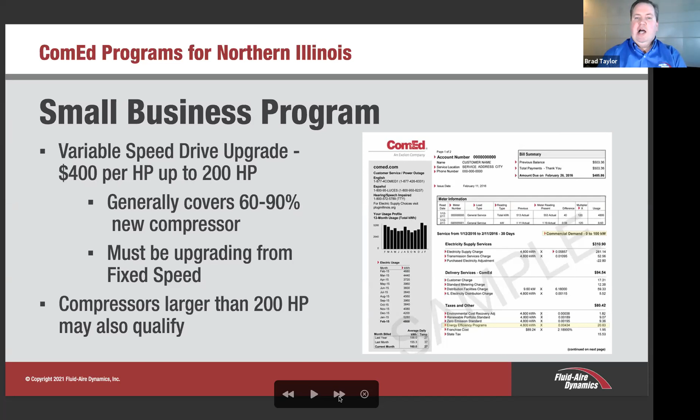There are a couple stipulations. I mentioned one earlier about the 12 months trending below 200 kW. The other is you must have a fixed speed rotary screw compressor already installed. They don't want to be incentivizing something that's not going to give them the returns they're looking for in energy. And compressor systems, I don't think they exactly limit it to the horsepower, but the larger horsepowers typically push accounts above the 200 kW mark. So it's very rare that we would see compressor systems much larger than 100 horsepower qualifying for the small business program.

Other rebates, we talked about the standard or prescriptive briefly, similar to the variable speed offering on the small business side where they're promoting $400 per horsepower. The prescriptive rebate for VFDs on the standard is $85 per horsepower. They're also covering zero loss drains and high efficiency air nozzles. Now, high efficiency air nozzles can include blowguns, which are the simplest form. But any of you that are using jets or nozzles for parts ejection out of a die and stamping, it's very common to see open blowing copper tubes. This would be a great addition to an energy savings campaign to add some energy efficiency type nozzles.

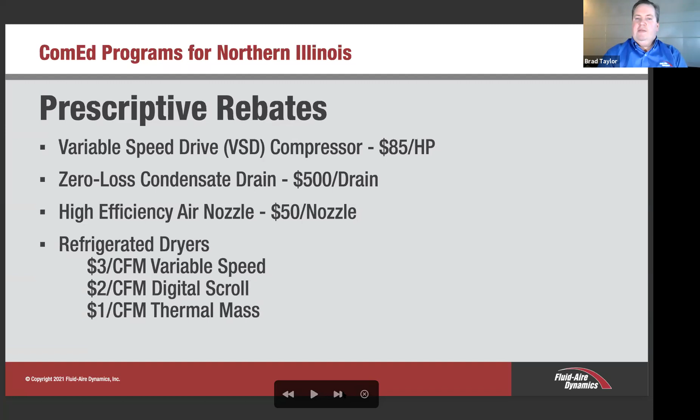And then refrigerated air dryers. There are different types out there in the refrigerated sector. Of course, there is the non-cycling type dryer that just constantly runs regardless of the load. And then there are 3 types of energy savings type dryers that are incentivized by ComEd. Firstly, the thermal mass cycling type dryer, which they incentivize at $1 per CFM. And then the digital scroll at $2 per CFM. And my favorite, which is the variable speed drive refrigerant dryer at $3 per CFM. And just a quick note on the variable speed type, typically we don't see them until after about 500 CFM, and they hold a very constant dew point. So one of my favorites.

Hey, Brad, before you go on, I wanted to share the results from that poll: 40% are using fixed speed, 20% are using variable speed, and 40% are using both. And also have a question from Matt. He's asking, is the 12 months below the 200 kW an average, or does it need to be under 200 each month? So it has to be under 200 each month. If you send me your account number, I can plug it into the tool that ComEd's provided us, and I can generate an Excel report to make it very easy for you. But yes, it does have to be under 200 kW for 12 continuous months.

Thank you. Just a note on that, I've had some customers that have multiple suites of their building with multiple meters all wrapped under one bill. ComEd does allow you to separate those bills into separate accounts. It'll take some time, but it is a strategy to getting a particular suite qualifying for small business going through that route. May take a year to qualify, but in some instances, very much worth it if you can wait.

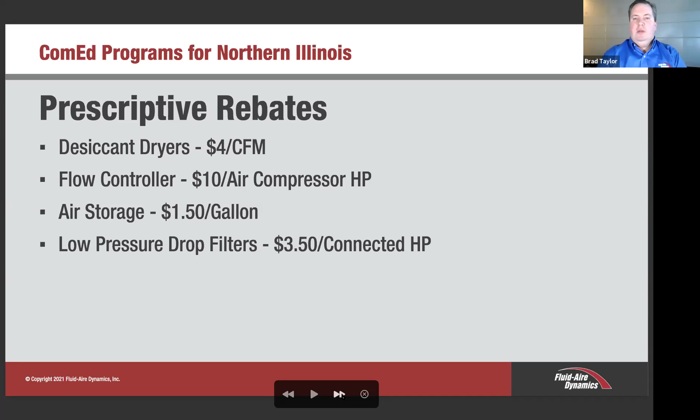Another program that's been very successful, ComEd launched, I believe, 2 years ago, is their Fix It Now program. And as the name states, it simply allows us to do a very quick implementation of certain types of projects in your facility. Most commonly done in the compressed air sector is leak detection and repair.

So they're paying qualified service providers $6 per horsepower, operational horsepower in your compressor room, to basically do the paperwork and review the system. And then $20 to identify any leak in your facility, and then an additional $100 to repair any of those leaks within your facility.

So what we have found is that at that rate, we're able to cover upwards of 90% of the leaks within your facility, largely because leakage is found in the simple down and dirty Milton coupler or Insta tube fittings, slit hoses, bubbly hoses, simple O-rings, things of this nature.

Of course, there's some of the more expensive leaks, such as a large cylinder or a metric cylinder that has to be sourced from overseas, or a leaky counterbalancer on a punch press. Of course, these are very costly repairs that would be in excess of the $120 ComEd's providing us.

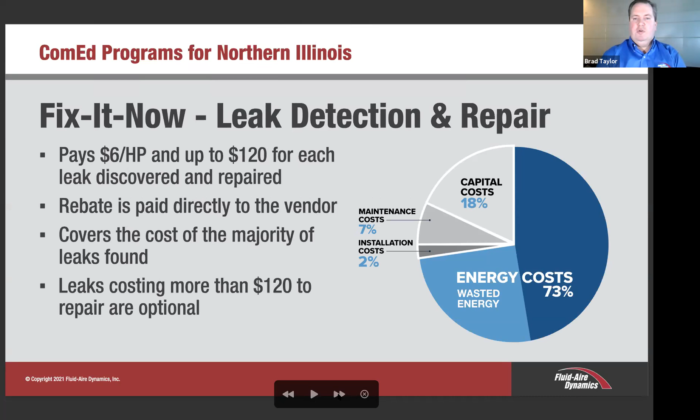So like the small business program, there are also other offerings, including the high efficiency air nozzles, which again is commonly just the blowgun. Low pressure drop filters is also $3.50. And then the no loss drains are $500 per drain.

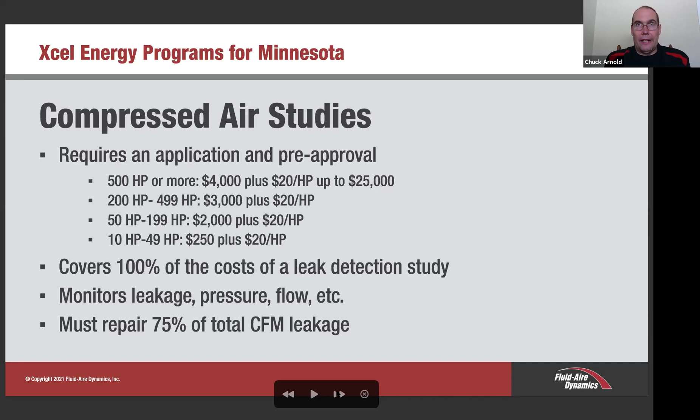So the responsibility of the customer for air studies, to make sure the vendor gets paid, and we all enjoy getting paid in the end, is to repair 75% of the total leakage. So you get the benefit of leaks getting tagged. After you fix them, you get the energy savings, and then we submit the paperwork to Xcel, and boom, Xcel pays us directly. The nice part about that program is there's no cash flow interruption for the customer. So the commercial aspects of it are handled between us and Xcel.

They're essentially a large low pressure drop filter, and those kinds of filters are the reason why they're incentivized, I guess, is the low pressure drop. Pressure drop is money, and that's why there's an incentive there. You can also get the same benefit by oversizing standard filters, and that's a practice that we use often, and

oftentimes a better solution. Cycling dryers cycle up and down with your plant's load, so the refrigerant compressor isn't on all the time. That'll give you $2 per CFM of dryer capacity. And again, people that need desiccant dryers, there's a demand control, it's called, on there that saves purge air. That'll net you $1,500 per dryer, and $1 per CFM additional of the capacity of that dryer.

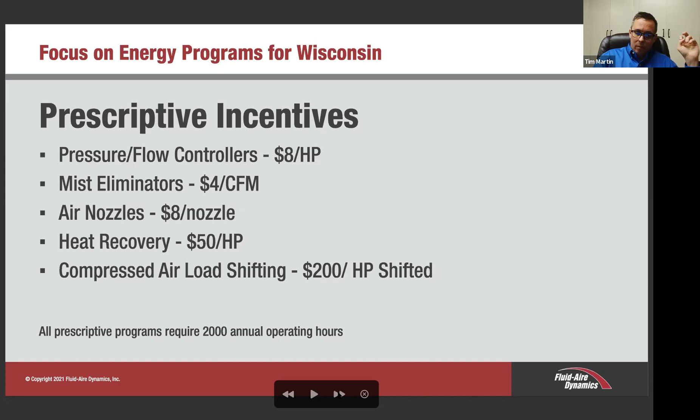Compressed air load shifting, that's going to be $200 per horsepower that is shifted. And that's for shifting inappropriate or inefficient uses of your compressed air to another type of process. Some examples might be the use of compressed air for blow off or cooling or air motors itself. The compressed air load shifting incentive is mainly designed for pre-existing buildings only, and the inappropriate use must have an annual runtime of approximately 2,000 hours. The other thing with compressed air load shifting: the projects do not require pre-approval from the state.

Compressed air studies: we offer a free service for everyone. It's through data logging. These compressed air studies will allow us to cover up to 50% of your qualifying process assessment, up to $7,500 through the state. It also covers leak detection and repair up to $4 per horsepower.

Custom projects. In regards to the custom projects, Focus on Energy covers projects outside of the scope of the prescriptive incentive offerings that I just explained. The custom projects and custom incentives must be pre-approved by Focus on Energy prior to the equipment being purchased, whether it's being ordered or installed. The incentive amount is typically determined based on the estimated energy savings through Focus on Energy, and the efficiency payback on the project must be between 1.5 years and 10 years to be approved.

How to get started? Talk with one of us sales engineers here at Fluid-Aire and let us stop in and assess your system. Number 2, have a free data logging study performed. Again, this is a free service for you, and it's going to allow us to see what your usage is on overall kilowatts using our data loggers. Identify upgrades to maximize the programs available, consider leak detection and repair, and let us assist you in every step of the process. So that's what we're here for.

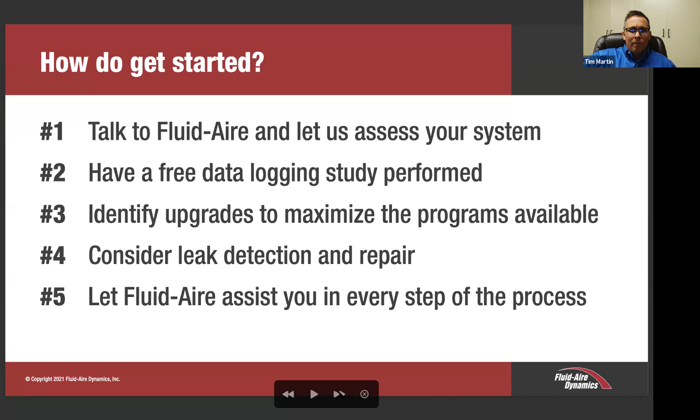Fantastic. Thank you for covering that, Tim. Yeah, no problem. And the result of that secondary poll was nobody thought they were doing a great job. 38% said they thought they were doing a pretty good job, 25% said terrible, and 38% said no idea. So there's some good work to be done here, and you can rely on the Fluid-Aire team or your local energy incentive provider to help you make those decisions, assess your situation and bring some additional value to your system.

With that, we have a couple of other topics that we can go into. We've got about 10 minutes left. We can talk about the benefits of variable speed upgrades, or we can get into some data logging. So Brad, maybe you could cover the overall benefits of the variable speed upgrades for those that are using fixed speed units, and then talk about data logging, and we'll be done. Yep. Great. Are there any questions we could cover at this point, Mike? No, I don't have any questions at this point. Okay, very good. We can go ahead and move on.

So just to make a comment on that last poll, those of you that don't know if you're energy efficient or are pretty sure you're doing a poor job, the first step is get someone that understands compressed air systems to do a simple review or a walkthrough of your facility. There's lots of simple things that can be covered quickly. In the Chicago area, those of you that are in the ComEd network, take advantage of that Fix It Now program. It's a no-brainer, literally.

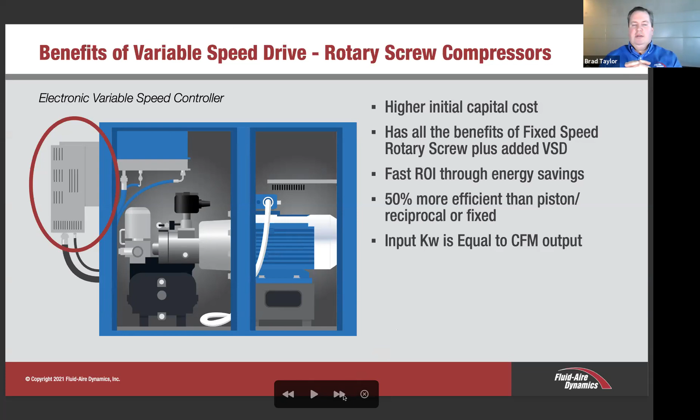Chuck, do you have any comments you'd like to make? No, I think that's a good overview.

Of course, direct costs related to producing the compressed air itself, but the pressure is directly proportional to the flow of unregulated sources or unregulated uses, such as leaks, the cylinders on your machines blowing, you name it. Every PSI is pushing that much more CFM through that orifice. Then, of course, lower pressure is reduced wear, it's reduced heat, lower RPMs, reduced noise, lower maintenance.

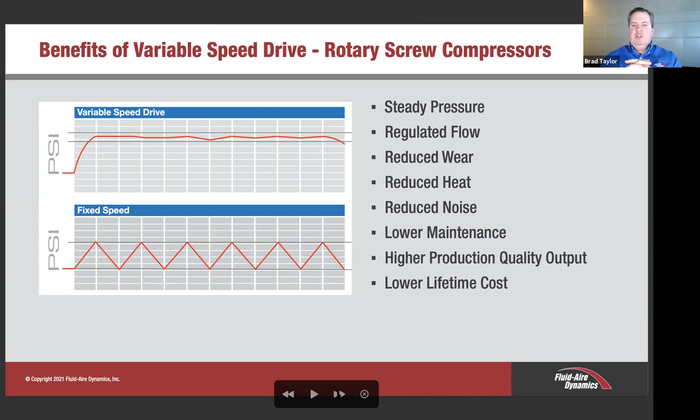You may get a higher quality production output, especially those of you using compressed air for stamping, where you're using pneumatic cylinders, or any of you in the woodworking industry that are using compressed air to mold things or clamp things. A steady pressure is beneficial. Those of you in the automotive industry, paint spraying, you know what it's like to have varying pressures. It varies your spray pattern. So there's a lot of benefits beyond just energy savings to a variable speed drive type compressor.

So this graph here really calls into light the overall lifetime cost of a compressor. You can see the energy to run it itself is about 73%. I've seen it as high as 80. The capital cost is just a small slice of that. So when considering a new compressor, it is an energy converting device. The more efficient it can do it, the better.

The chart on the left there shows the different modes of operation. The dotted green line is ideal, and a variable speed drive holds very close to that line. Those of you that are running in the modulation mode, that would be that blue line towards the top there. At zero flow, you're still consuming about 70% of your nameplate kilowatts. That's immense. So data logging helps identify these trends. That's why it's very beneficial to do data logging.

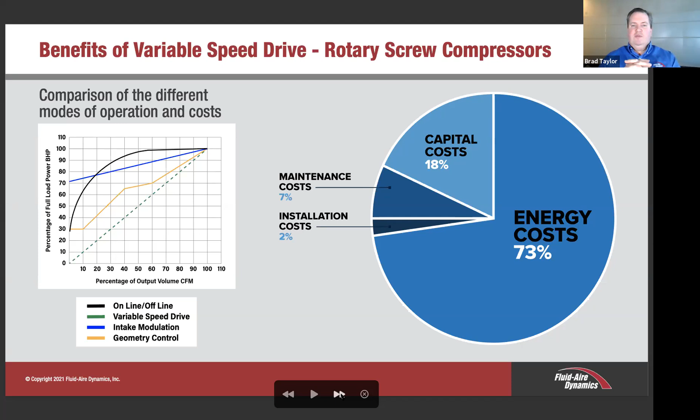Once every 2 years, but 5 years might be getting a bit long. The Fix It Now program allows us to do it every year, so take advantage of that. And simply, we're attaching an amp logger, as you can see in the photo there. It's pre-programmed. We come out and pop it on around one phase.

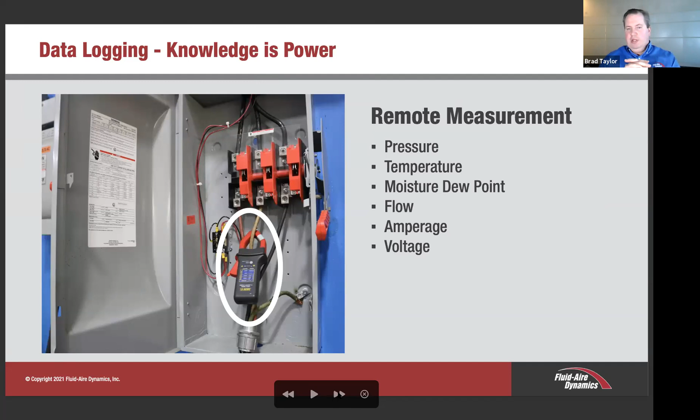And from that, we can see whether the compressor is loaded or unloaded based on the amperage at which it's running. And from that, we can gather a lot of information. Not only the unloaded KW, your total plant KW to produce compressed air, but what time the shifts are starting, what time the shifts are ending. A lot of information that can be helpful here.

This chart here shows at the beginning and ends of shifts, you can see the leak rate. You can see in the last slide there on Saturday, you have your continuous flow. Someone left the compressor on, and you're constantly consuming X CFM.

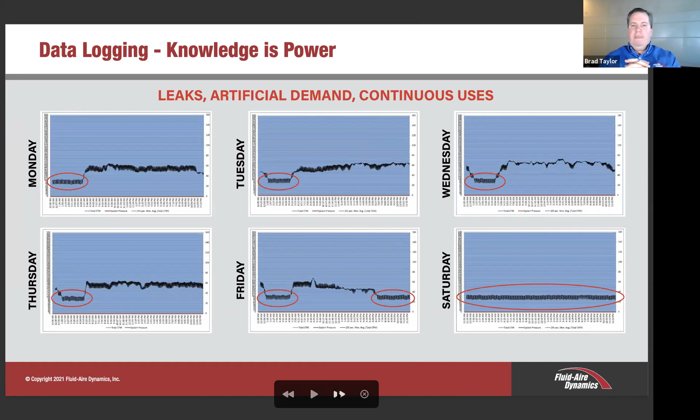So that calls into question how much of that could be reduced, and why was the compressor left on a Saturday? You could have uses where they just needed to keep one piece of production operational. Those of you in the machining industry, you have that one lab with your CMM machine. Why not get a dedicated compressor for that rather than feeding the whole plant's leakage? So hence the name of the header here, knowledge is power.

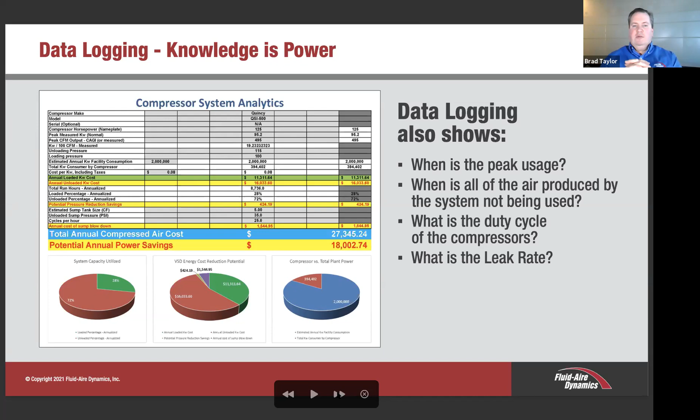And this is a sample report that's outputted from the data that's provided. I know it's hard to see, but it'll tell us the total KW of your facility, tell you what the carbon footprint of that compressor system is. We'll tell you how many KW you're wasting, what the dollars and cents is that can be saved by going with a variable speed type compressor, and what % capacity you're operating your compressor system at. So it can even help with some capital purchase planning for the next year, those of you that think you're running out of compressed air.

But also help us understand what compressors should be staged or sequenced in which cycle. What I mean by that is you may have a variable speed drive that's running as the secondary compressor, and you have a base load or a load unload machine running as the primary. It's rare this happens, but sometimes we do identify where you have controls that are fighting each other. And with a simple few button pushes, we're able to rectify those situations and save companies thousands and thousands of dollars. So by doing this logging, we can identify things that are very simple to fix.

Excellent. We do have a question from Spencer, and then we'll go ahead and wrap this up. Spencer's asking, when running multiple compressors, is it more beneficial to switch over to one or two larger new compressors? Yeah, so we get this question from time to time, and it's a good one. So there's a couple aspects to the answer.